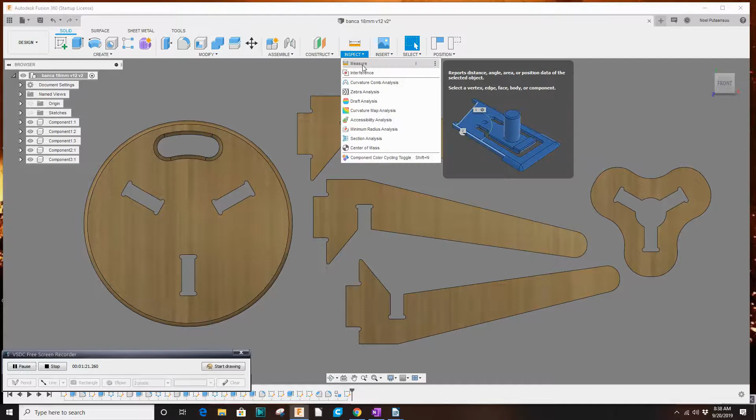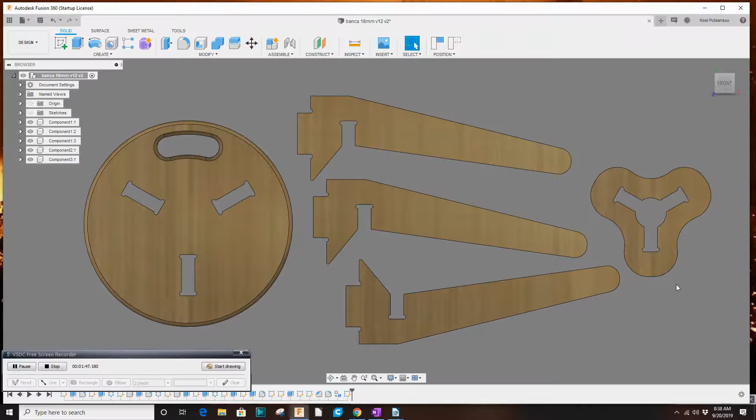I was going through here and noticed that all of these have a 19 millimeter gap. My plywood is 18.5 millimeters, so it appears there's going to be a small gap. That may be good. I'm just going to make it as it is.

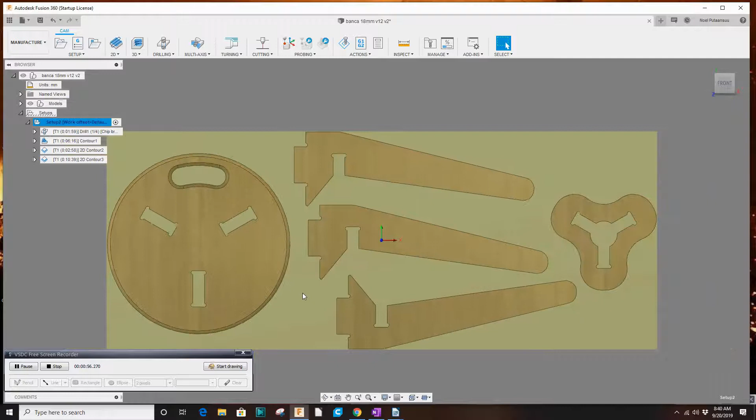Alright, so I have a toolpath I created for drilling. I'm not going to use this one, and I'll show you why in a few minutes, but normally for the dog bones I need a drilling operation.

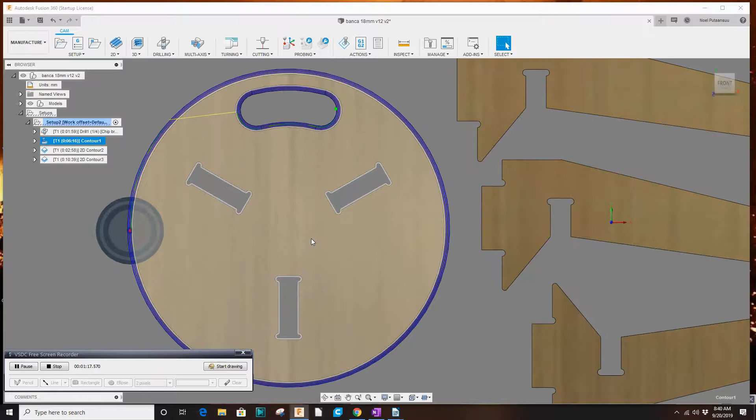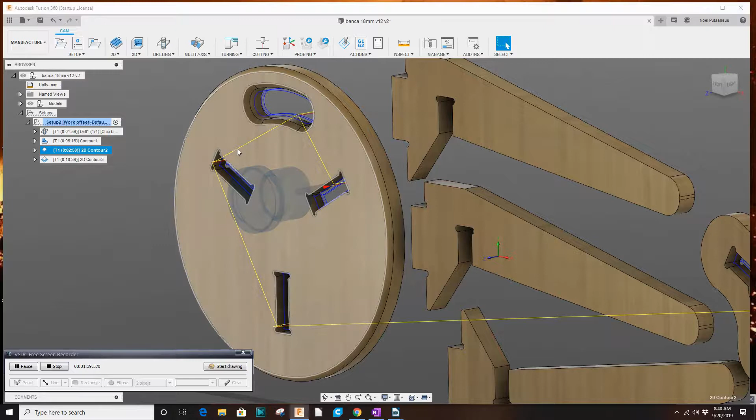I have a contour section here. I'll try to put a little bit of radius - this area is a nice flowing area, plus the edge of the stool is a nice flowing area. So I have a ball end contour to make that a nice smooth transition there. Then I have all the inside pockets in one toolpath, and the third toolpath is to cut all the parts out.

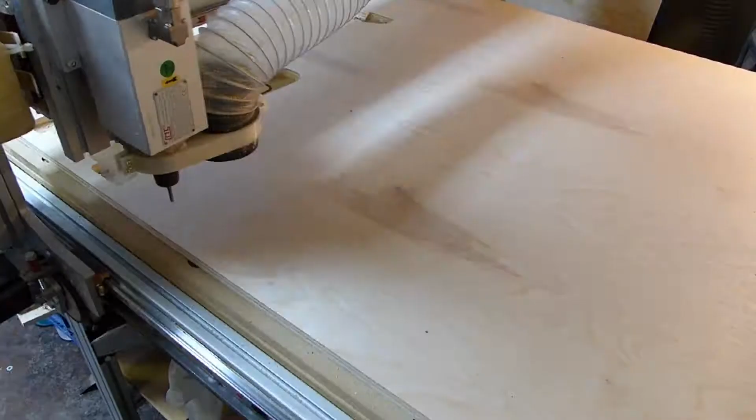This is the ball end toolpath. It's a 3D contour.

This is the interior pocket tool path. It's a two-dimensional contour path for just the interior pockets.